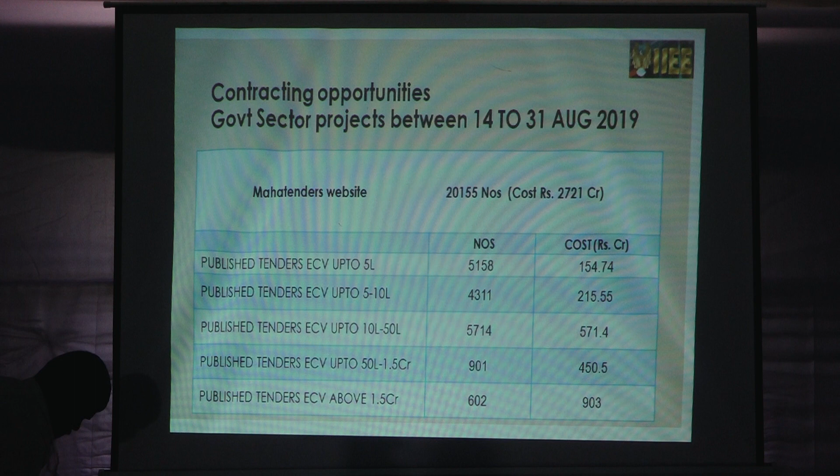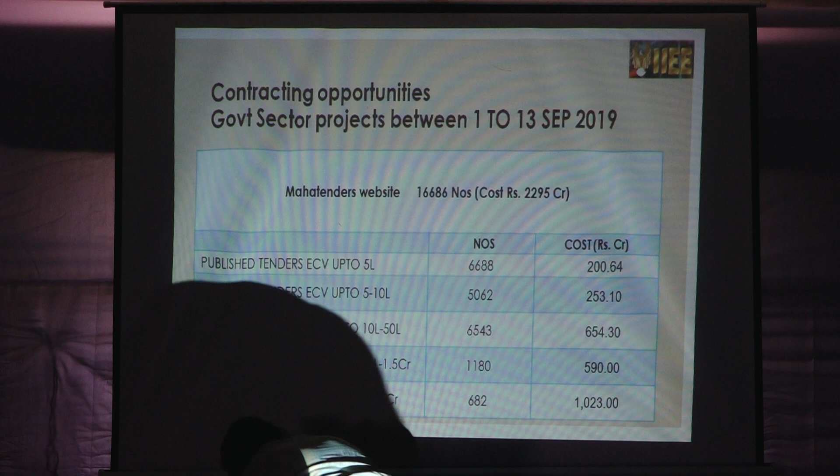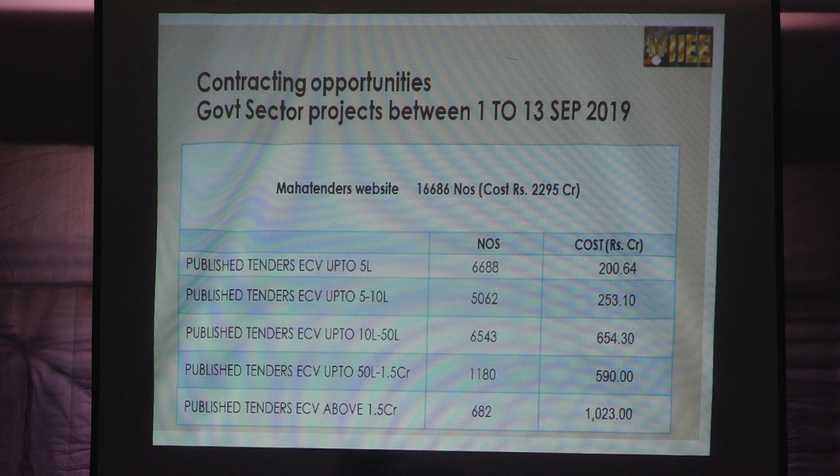This is the data from September, almost the same numbers, 16,000 projects at a cost of 2,295 crore, 2,295 crore in Maharashtra itself in 1 month. So look at the opportunities as contractors or subcontractors that you can make it.

Opportunities for young engineers. Now this is my very special slide that I have prepared for young engineers. Apart from these routine jobs, what are the opportunities for young engineers? Now that I told you that the government is pumping in lakhs of crores in these highway projects, the projects are not going to happen through your normal technologies or normal techniques. So you have all these imported machines, you have new technologies, new materials that have come up from foreign collaborations.

So what are some of these techniques? I'm just going to briefly tell you. Network survey vehicles, which are used extensively for digitization of the highway data for highway maintenance projects. You have drone surveys for digital inventorization. You have the falling weight deflectometers for evaluation of all these highways for augmentation, for rehabilitation. Mobile bridge inspection units, retro reflectometer technology in roads, automatic traffic classifiers, ratings for pavements.

It's a very big upcoming area. You have people sitting in front of the computer screen looking at photographs, GPS connected photographs, and rating those pavements so that you can take maintenance decisions. That's a very big area that has been coming up. I know people who take up jobs in the United States. They take the data from here and they do it. The analysis is being done outside. So a huge amount of that data is available for you people to analyze and get into this sector.

Rating for pavements, road stabilization. We have our expert, Mr. Nikhil Sharma, who is going to talk about all these important technologies such as road recycling and road stabilization.

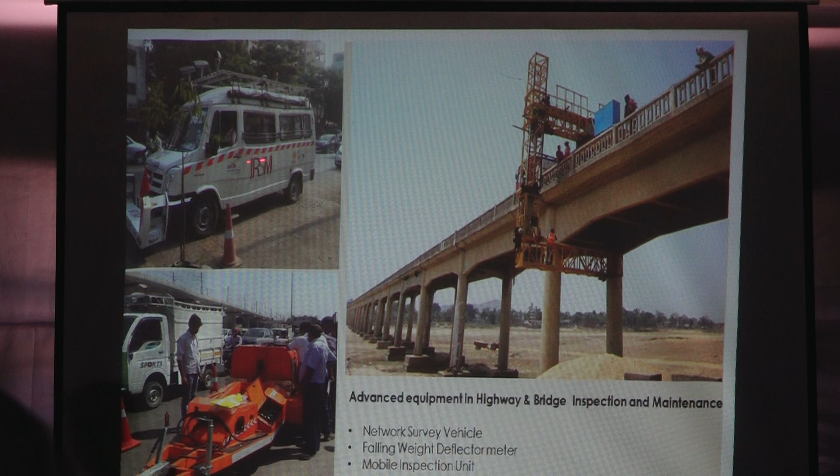So the network survey vehicle that I was talking about. Now government has taken up all these national highway projects. Most of these projects are going to come up for maintenance, and some of the previously constructed projects are already in the maintenance phase now. So how do you do the maintenance? The data, how do you collect the data? The data is collected by this advanced equipment. This is called a network survey vehicle, NSV.

It's a GPS and high resolution camera mounted vehicle, which is being made compulsory by the government for ownership with all consultants. So all consultants are expected to have this network survey vehicle where the data is digitized. So you don't actually go on the field and collect the data manually. You have these high resolution cameras mounted in the front of the vehicle, at the end of the vehicle. You also have these lasers mounted here so that you get a profile of the road, the cross slope of the road, and you generate the 3D model of the road. So ample opportunity here to work in these technologies.

We have the falling weight deflectometers. For all the new roads that are being taken up, the strengthening requirements are being decided based on the testing from these vehicles.

I think I'm comfortable talking here.

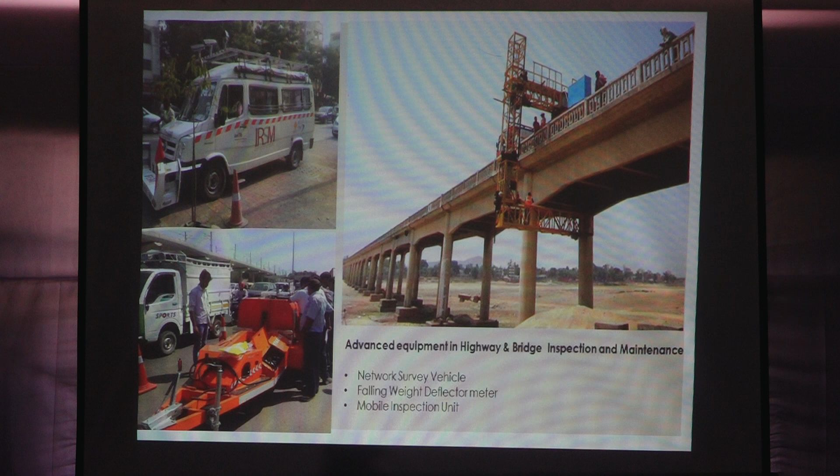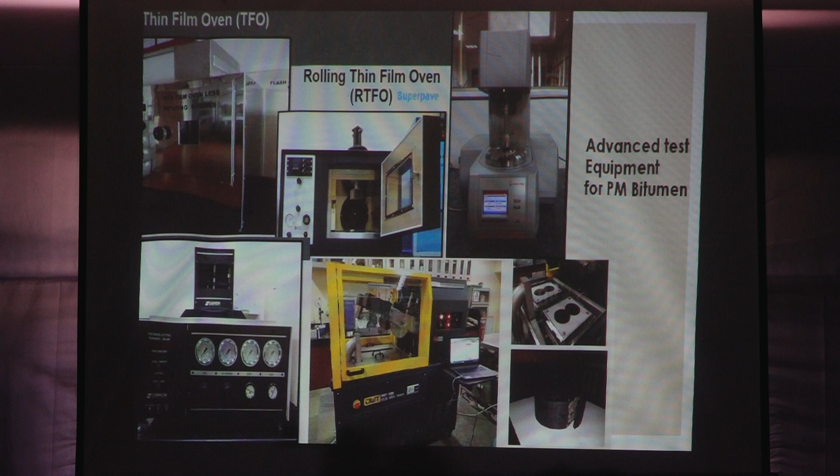Then you have the advanced test equipment. As I told you, the new specifications have been introduced. Just 2 months ago, India has now adopted the Superpave specification. Earlier, most of you must have studied the Marshall specification. Now we have switched over to the Superpave specifications for polymer modified bitumens. These advanced materials are being tested with Superpave specifications.

So there is ample opportunity to get into testing of these advanced materials through these advanced equipment. So collaborations are available. People are here with these advanced equipment, so you can train yourself into these advanced equipment. You can set up your own lab. You can have your own testing facilities in these advanced equipment.

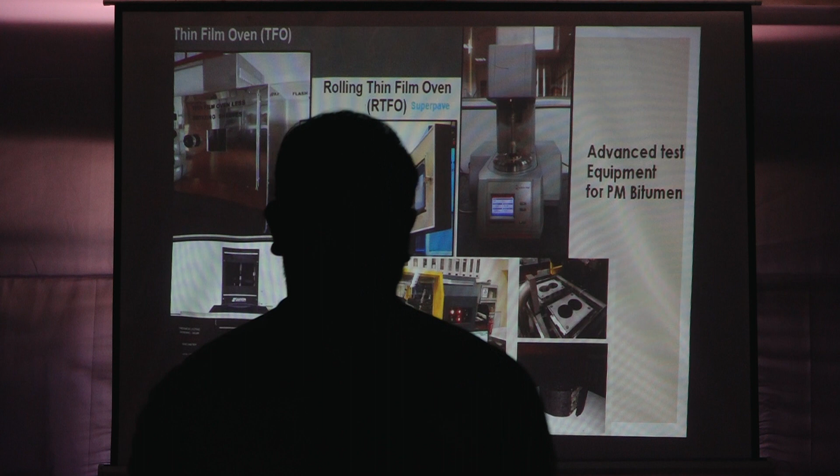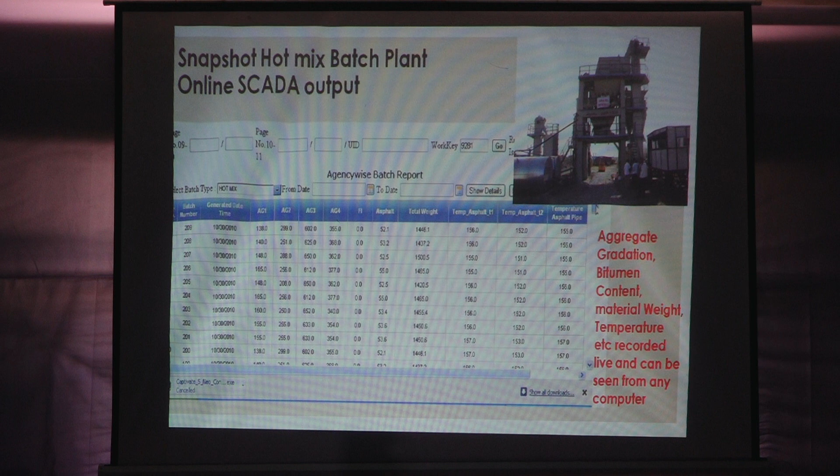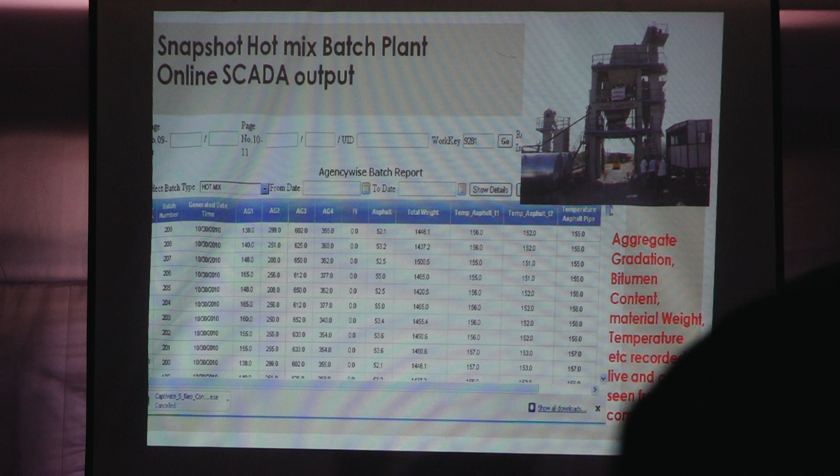I told you about the IT applications. IT applications in construction monitoring. Many of the agencies, the central government agencies, the municipal bodies have switched over to the SCADA system. You have so much of advancement right now that my hot mix plant or my batch mix plant is connected to the server, and in real time I can see on my laptop or on my mobile phone what is happening at the plant, so that the engineer at a remote place can also monitor the material that is coming to his site.

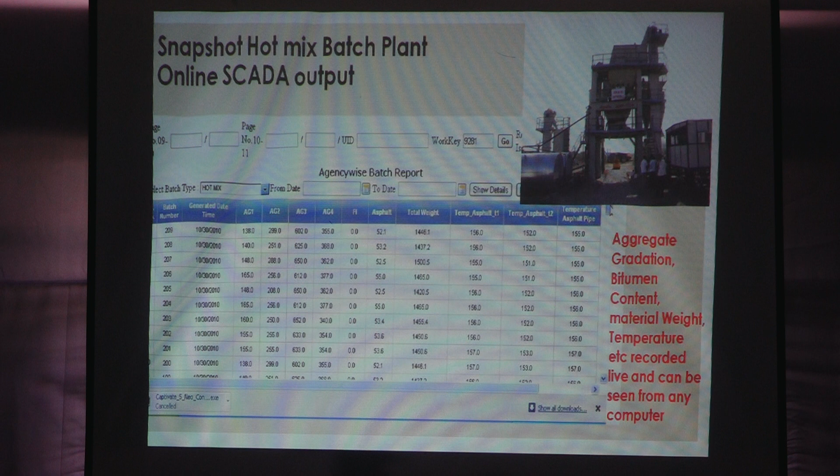So these are not research-based projects. These are projects which have been implemented. They are ongoing for the last 5 years, 10 years. So IT applications in construction monitoring, in all major projects, this is being done. So very good upcoming areas.

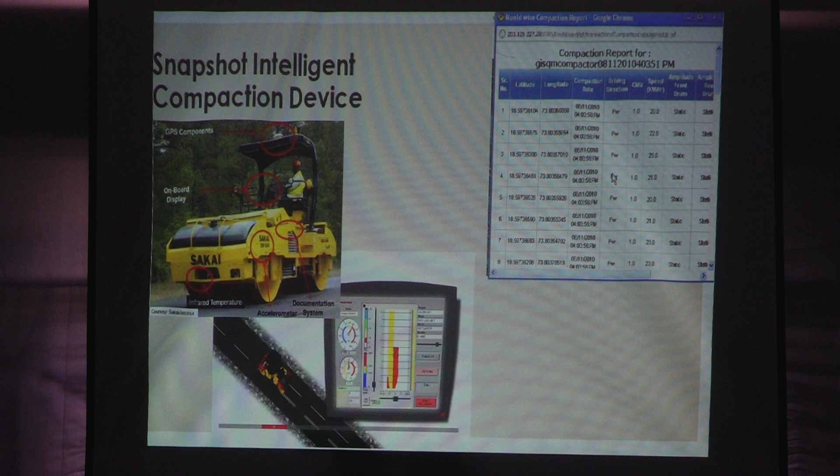Intelligent compaction devices. Most of our compactors are now fitted with intelligent compaction devices which are GPS connected, and they can tell the operator whether the exact density has been achieved or not. So this is a very upcoming area, intelligent compaction. I have shown you some snapshots here. This is real-time data that gets monitored on the client website. So you can see if the compaction has been done correctly or not, how many passes have been done. Everything can be seen on the IT server.

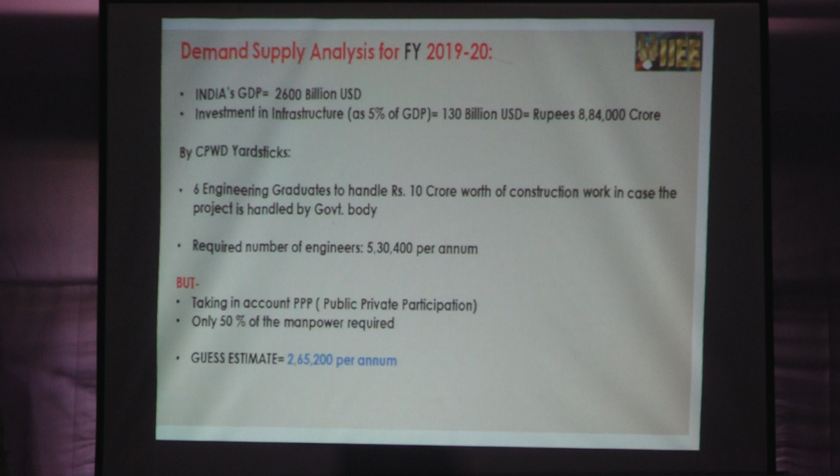So now I have done a small slide, but I am not going to spend time on numbers because we have another speaker lined up. So this is the demand and supply analysis that we did for civil engineers as per our research and research from the industry. This is the current status. Demand for new civil engineers annually.

2,65,200. And supply, the people who are coming into the industry and who are employable, who have the required skills, with whom the construction companies and consultants are comfortable to work with: only 66,000. Look at this gap. There is a huge gap for you to chance upon, a huge gap for you to get yourself into that category. The demand is 2,65,200.

What are the problems that we are facing? I'm going to end in 5 minutes. The problems faced by the industry: retaining good talent. People with good technical expertise, it is very difficult to retain them. And specifically, fresh engineers are not ready to work on the site, on the road side, because it's a bit tough. It's very unfortunate. But as civil engineers, you need to understand this.

Lack of computer skills, communication skills, project management skills with the fresh engineers. That's a big key area that we have a problem with. Lack of interest in site-related activities. Lack of skill upgradation. As civil engineers, how many of you are taking up skill upgradation programs? How many of you are trying to learn new software, new techniques, or new codal provisions? Civil engineering curriculum lacks human asset management.